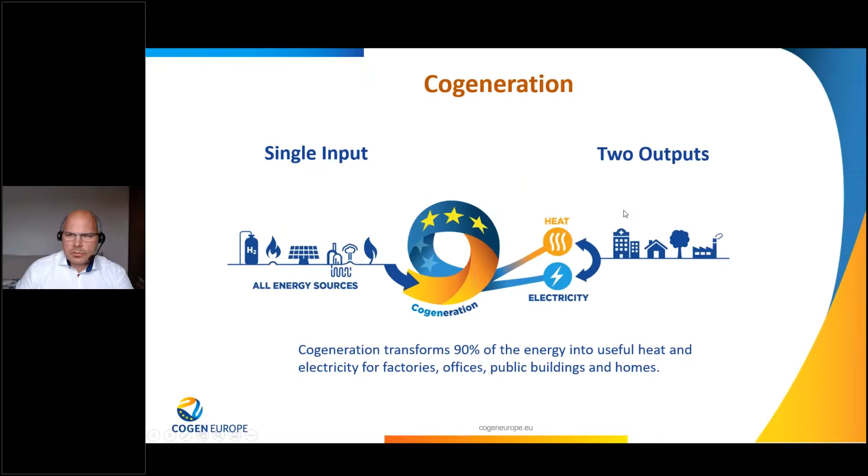Thank you. Just bear with me 1 moment. I will bring up my slides. Oops, wrong presentation. Hopefully you can see. Yes, we can see the presentation. Yes, apologies for that. There's always a technical glitch and it seems to always fall on my hands.

So good morning, everyone. Thank you for the very kind invitation to present COGEN Europe and the status of cogeneration in Europe, and more specifically the role of biomass in cogeneration in Europe. So just very briefly about our organization, it's quite straightforward. We're the cross-sectoral voice of the cogeneration industry in Europe, and our primary focus is advocacy, working with EU institutions, the European Commission, the Parliament, the Council and Member States, and we do so working with our members to build robust arguments using their expertise, and of course working with many different organizations, as for instance demonstrated this morning in today's webinar.

Our membership is quite diverse. We're a hybrid organization in the sense that we represent both national associations, so 12 different national associations from across Europe, but we also have around 50 different corporate members. And I think what is unique about COGEN Europe is that we represent the entire value chain for cogeneration in Europe, starting from the manufacturers, the OEMs, so from kilowatt to megawatt, but we also represent the utilities, the ESCOs, and finally, of course, the end users, those who actually use the technology.

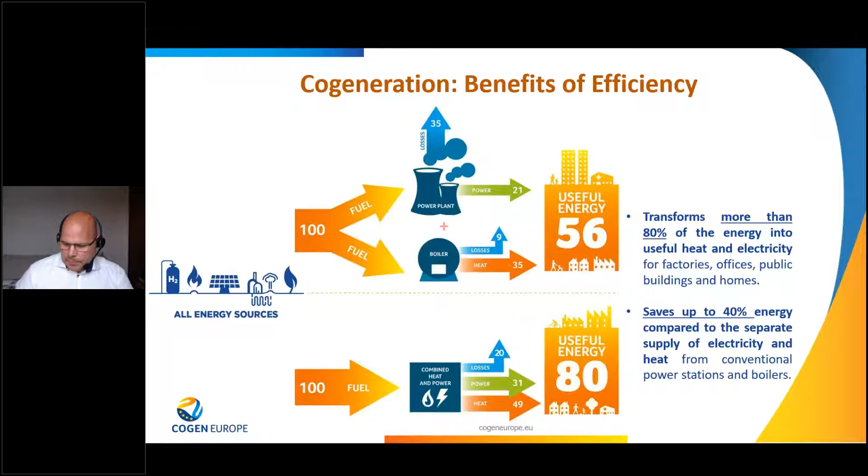Cogeneration is all about putting energy consumers at the center. That means industry. Over 90 million European households in Europe benefit from district heating. There are over 100,000 active energy consumers in Europe. That means individual dwellings, homes, but also SMEs that use CHP to generate their own heat and electricity.

You also have many iconic buildings. You may or may not know this. For example, the headquarters of the European Commission uses CHP. Some of the European Parliament buildings use CHP. Iconic Buckingham Palace uses CHP, and the list goes on.

So today we see cogeneration responding to many new challenges, such as cutting emissions, lowering costs, saving energy obviously is key, but because of the decentralized nature and the range of different sizes of the technology, it helps empower citizens, but also businesses, large businesses, industry.

The technology provides flexibility today already. In the future, that'll be even more important. Because of its decentralized nature, it avoids costly grid reinforcements where you have more centralized baseload power. It's already smart grid ready. And then finally, of course, it helps integrate renewable energy at lower costs.

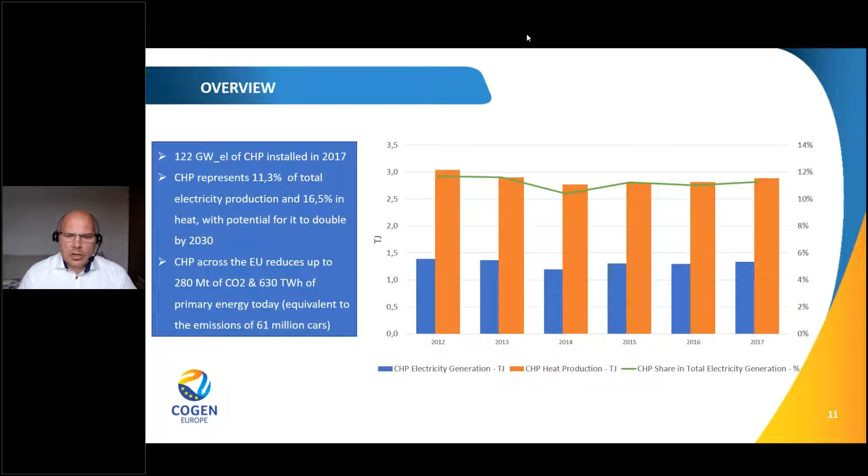So I discussed a little bit about the fuel mix. It has been predominantly fossil. In the past, lignite and coal had a much more significant role, but if you can see the trends here, that has been replaced largely by renewables and natural gas. So as I mentioned before, the share of renewable CHP has gone from 13% to almost 30% in the last 10 years.

A majority of that is in fact biomass, but there is a growing share in terms of waste heat and biogas. What is clear is that at least in the past, and I guess in the short term at least, natural gas will continue to have a role.

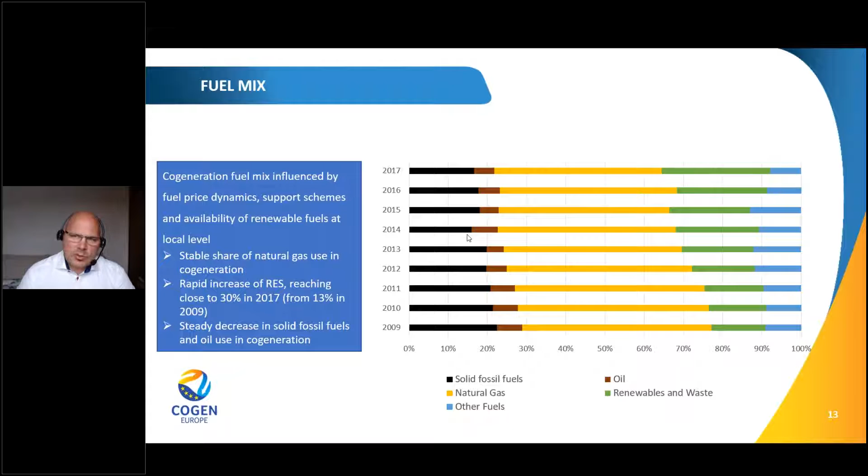And this is in fact my last slide. It is an overview of market developments in Europe in the last, say, 5 years, between 2013 and 2017, and you have interesting trends. What's clear is that renewable and natural gas cogeneration continue to play a significant role in terms of the installed capacity, and there is growth in the commercial and domestic cogeneration over these past 5 years.

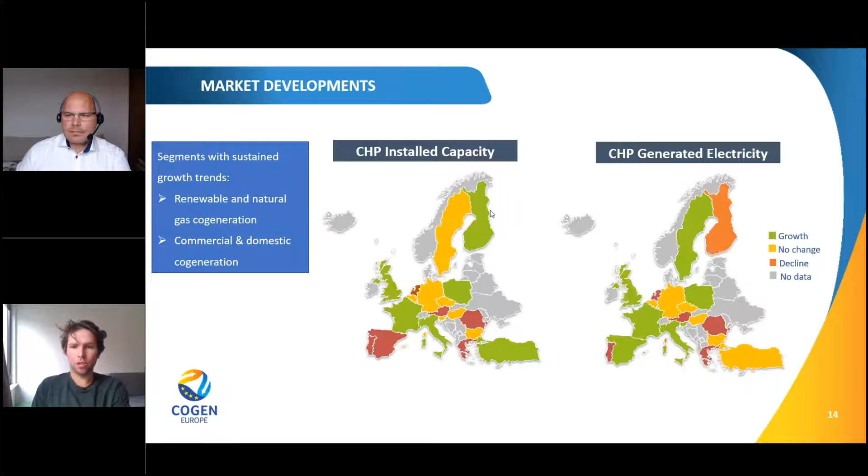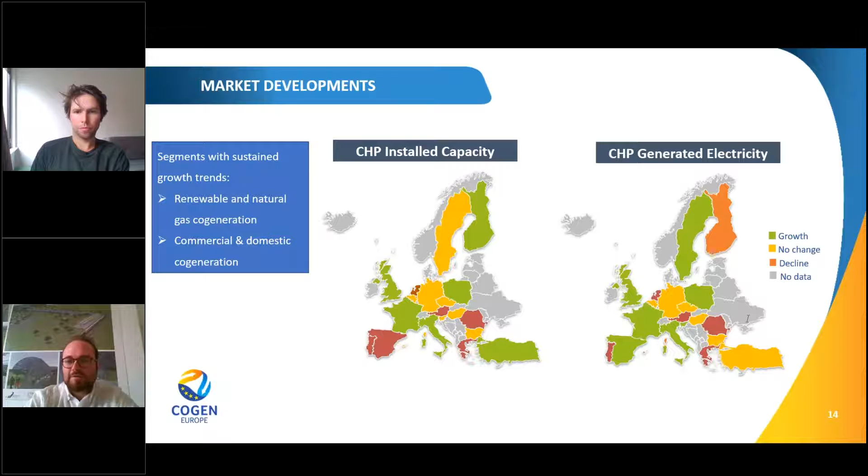So now we move on into the project section of our webinar today. We will start with the first project, the BLAZE project, and as I mentioned at the beginning, today we're going to have two projects dealing with cogeneration from biomass using different technologies, but still in this field. And I will give the floor to Professor Enrico Bocci from the University Guglielmo Marconi in Rome, who is the project coordinator for the BLAZE project. Enrico, the floor is yours.

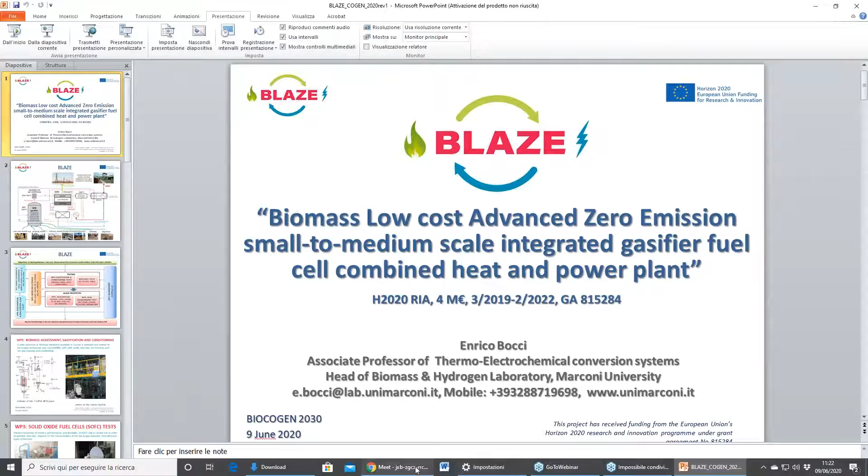Sorry, okay, I have to activate. Okay, now you see me? Okay, and I hope that you see also the screen. You see the screen? Yes, we see the screen.

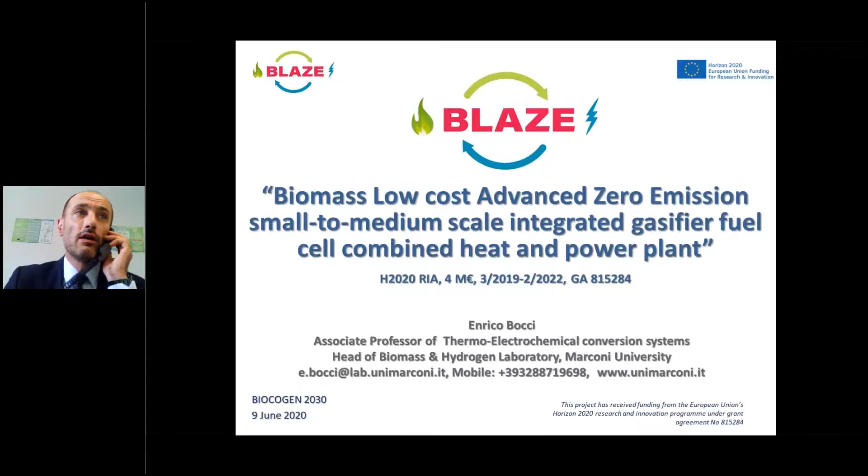So, Blaze is a biomass low-cost, advanced zero-emission, small to medium-scale integrated gasifier, fuel cell, combined heat and power plant. So it's really in the stream of what you listened to in the last presentation, because when you try to take more waste heat, there is the problem of using different biomass in the same reactor for different periods of time, in order to use more types of biomass, also biomass that is not available for cogeneration.

In this case, we try to use a bubbling bed gasifier. We have to crush the biomass in little pieces, but we can also use high humidity biomass, and also biomass with high ashes, high content of contaminants and so on, because we also have sorbents and catalysts inside the gasifier, the reactor. We use hot gas conditioning in order not to waste heat and energy cooling the gas for cold gas conditioning. Afterwards we use a solid oxide fuel cell in order to increase the electricity and have almost zero emission at the end.

So this project is aimed to increase biomass use, increase the efficiency of this power plant, reduce the emission, so it is exactly in line with the trend to increase cogeneration, increase renewable energy in cogeneration, decrease emissions, and increase efficiency. In particular, we try to do that first with a very large work on the lab scale that has already started, because this project is more than 1 year in.

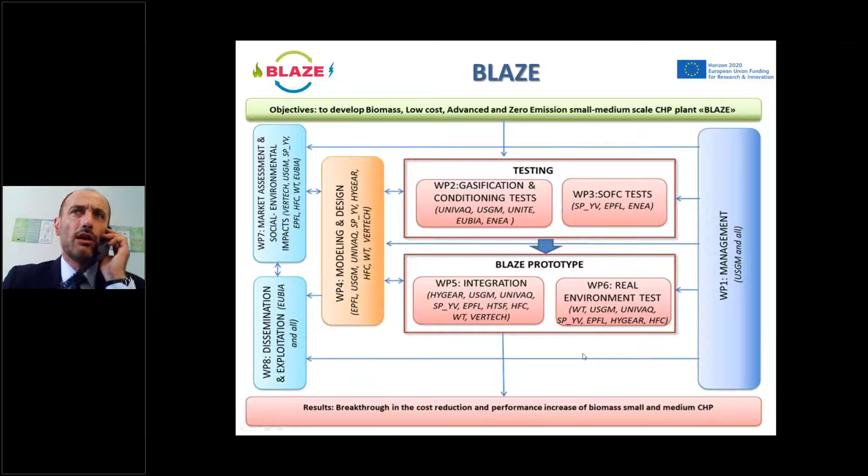There is also modeling and design for this activity, and the assessment part and production estimation part. So in this project we try to develop a low cost plant, and arrive at a breakthrough in cost reduction and performance increase, reduction of emissions and increased possibility to use more biomass waste. So I will show you some photos about the different work packages.

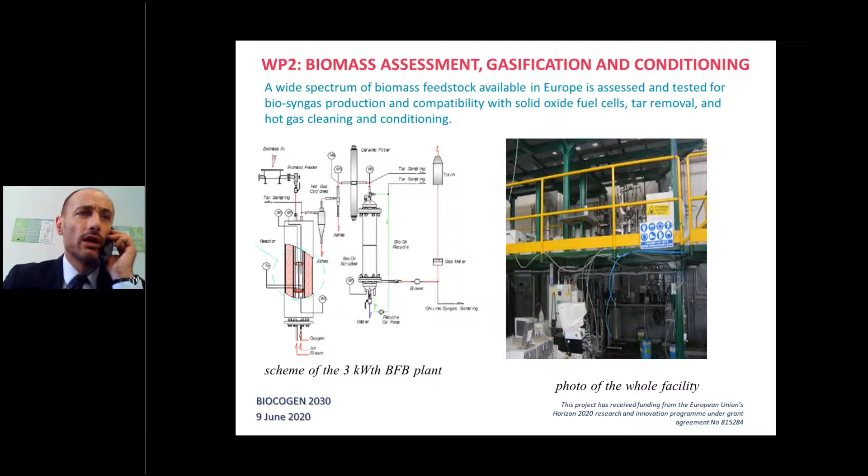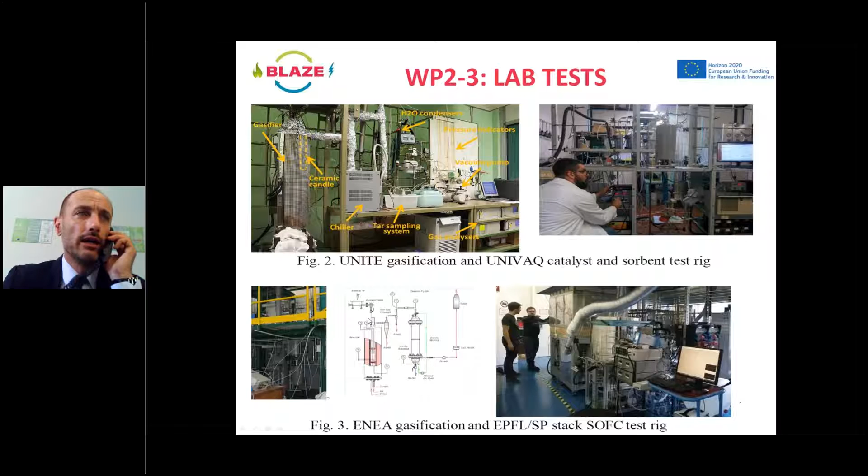This is work package 3. In work package 3 there are also all these other gasification units in University of Teramo and University of L'Aquila. This is for the online autonomous test of many hours for the conditioning system. It is mainly composed of ceramic candle filters inside the freeboard of the gasifier, and there is also sorbent in order to eliminate the contaminants. And this is the stack SOFC test that you already saw in the other slide.

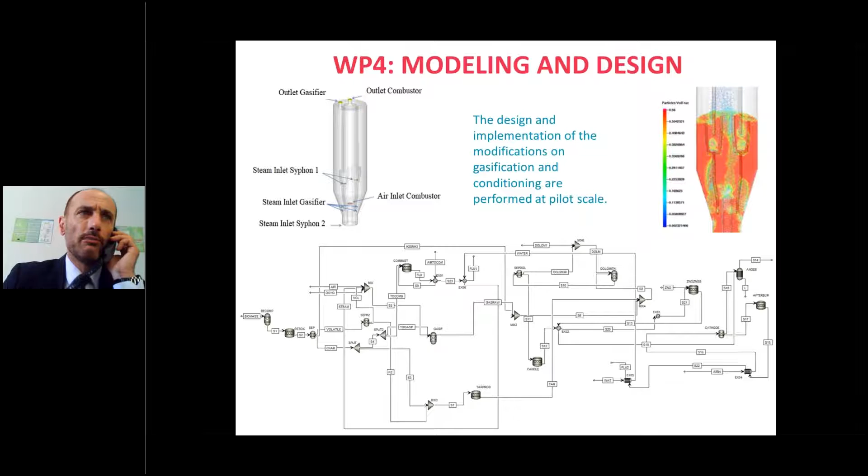So work package 4, modeling, has also already started. We started CFD modeling of the reactor, and we have also made the Aspen simulation of the whole plant, in order to understand and better make all the integration of the plant. Of course there are very different systems that we are analyzing, more than 23 combinations of what the plant can be, also changing some temperatures and so on.

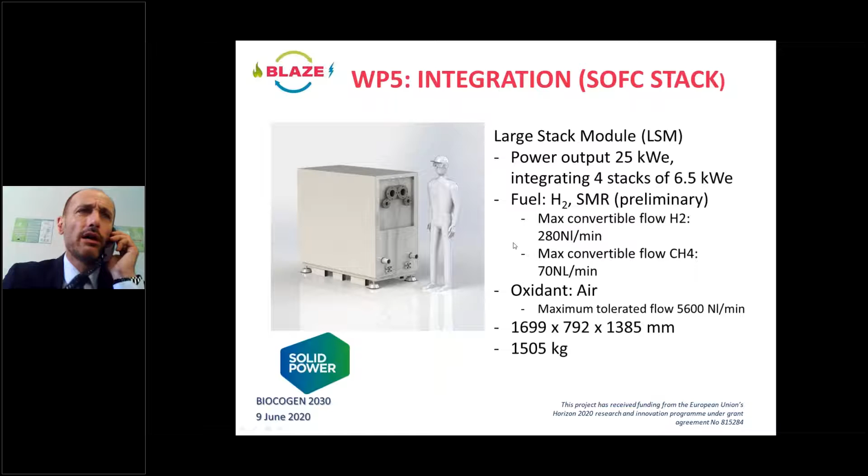There are two bubbling beds, but with different fluidization velocity. This means that there is a recirculation of hot material from the combustor to the gasifier, in order to give the heat needed for the gasification reaction.

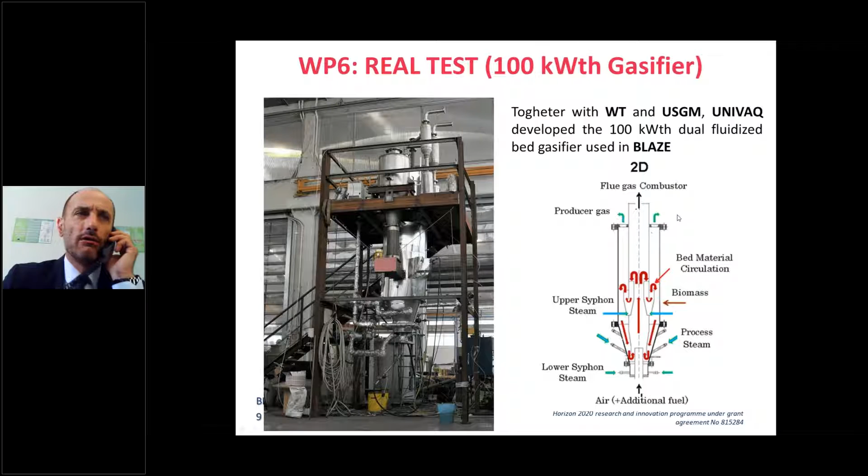So I have a syngas that is free of nitrogen. It's a high calorific value syngas, mainly composed of hydrogen, CO, and a little part of CH4. So it's a very good gas to send to the SOFC. Of course, there must be a filter candle to eliminate the particulate, and also elimination of sulfur, chlorine compounds, and other contaminants for the SOFC.

The techno-economic, social, environmental assessment has also already started. We have made a preliminary economic evaluation, also social aspects, legislation, environment, and health and safety evaluation. The work package on dissemination and exploitation of results has also already started. We launched the website.

On our website there is now a deliverable about the biomass analysis and about the hot gas conditioning, especially for the SOFC, so a list of all the literature, contaminants, and so on. And for the biomass, also the experimental results. For the SOFC, in the next 3-4 months we will finish this part, and we will put also the deliverable about the experimental results on the conditioning and the SOFC itself. So this is almost on.

I go very fast, but maybe you can ask me anything about this project. I would like only to show that this plant has to reach more or less 50% of efficiency. A biomass plant normally is in the range of 10-20% of electrical efficiency, so we will double the efficiency of the plant using the hot gas conditioning and the SOFC. We will also reduce the cost, because the SOFC is a very high cost part, but because it produces more than double the electricity, the cost will be reduced.

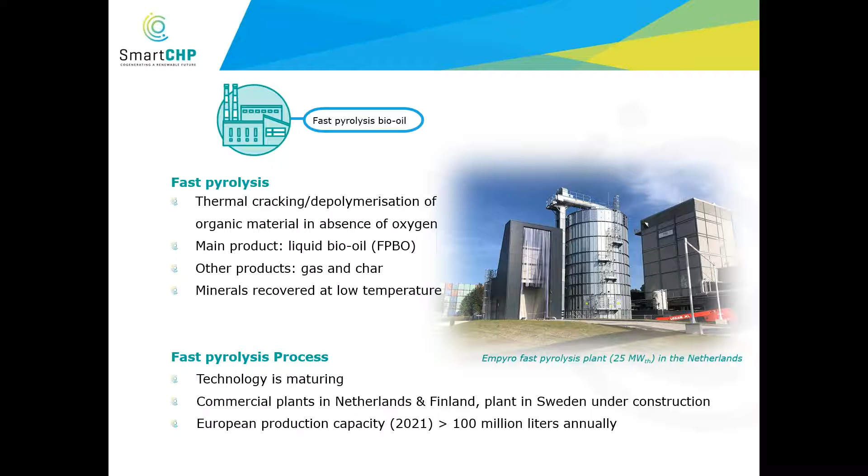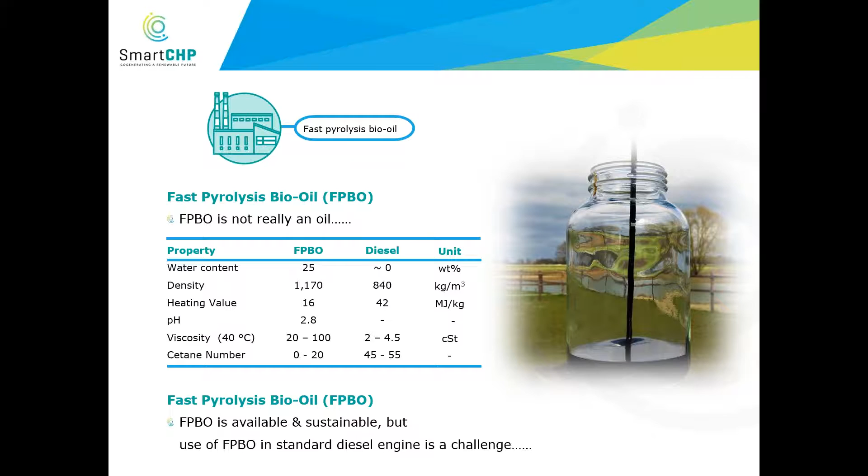So if you look at pyrolysis oil, it is available nowadays, it is sustainable, but if you want to use it in a standard diesel engine, it's really a challenge. And that brings me back to the concept that we want to develop. This fast pyrolysis oil, we use it as a fuel for the engine. So we will further develop the engine. The big advantage of a diesel engine is that the electrical efficiency is quite high. You can have efficiencies above 40%.

In addition to that, we have a flue gas boiler, and we use the flue gas from the engine. In particular, it's helpful if we run the engine at low loads; we can add additional fast pyrolysis oil to the boiler, generating additional heat. And that's one way that we can change the ratio between heat and power over a wide range. We also know that the emissions are too high, so we will also develop the flue gas emission treatment, so that we have low emissions from the system, high flexibility on the output, heat and power.

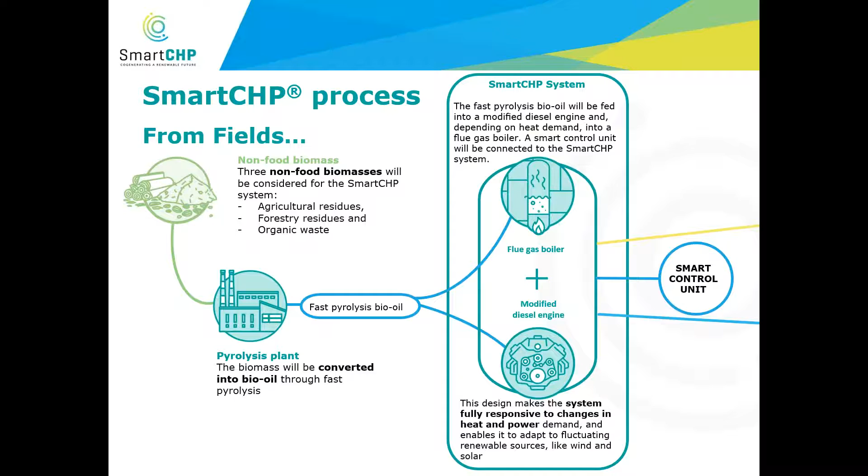To find the optimal conditions, we are working on a model for the system, but also to develop a smart control unit. So we will be able, depending on the demand, to find the optimal operation window. Well, with this fuel, we have the heat and electricity. We can look at different markets: small scale industry, the service sector, like hotels or hospitals, public buildings and so on, islands, remote areas. It might even support district heating. The size we are looking at is typically 100 kilowatts up to 1 megawatt. That's the size we have in mind for a commercial unit. So it's what we call small scale.

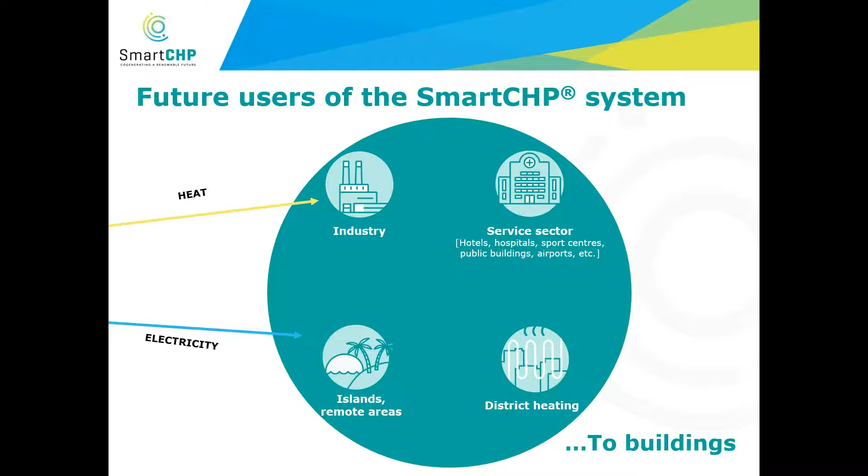We have some specific benefits, or we think we have specific benefits, because we are running on fast pyrolysis oil. Fast pyrolysis can deal with a lot of different types of biomass and also residues, converted into a more homogeneous liquid, and using this liquid to produce the heat and power. I don't think I have to explain more on the efficiency. I think it was already well done in the first presentation by Hans on the advantages of combined heat and power in general.

If you look at more renewables, it is flexible. If you look at the European Green Deal, we aim for climate neutrality, at least in 2050, and also with increasing variable and fluctuating renewables like sun and wind, we also need more renewable backup power, and I think SmartCHP can contribute to that. Well, less greenhouse gas emissions, I think it's clear, and we can have a very high greenhouse gas emission reduction compared to fossil fuels. So I think the benefits are clear. Then, of course, the question is what will we do to achieve these goals?